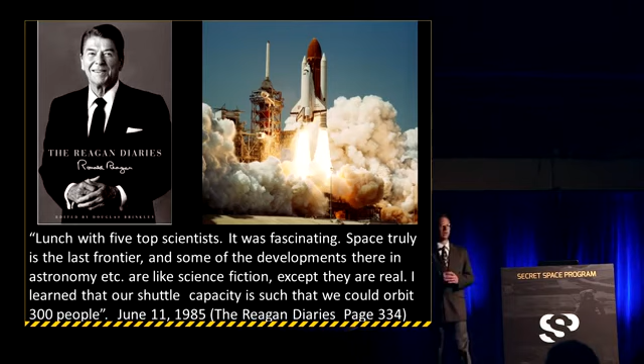So I want to ask all of you today, the shuttle only holds 8 astronauts. How does Reagan get this 300 people going into this shuttle system? How could this possibly be true?

Then we've got some interesting statements made by Neil Armstrong. It says this is July 20th, 1994 at the White House: 'There are great ideas undiscovered, breakthroughs available to those that can remove one of truth's protective layers. There are places to go beyond belief.' Neil Armstrong, 25th anniversary of the Apollo moon landing. Then we have Above Top Secret by Timothy Good. Interesting statement here, a transaction between a scientist, an MI6 individual, and Neil Armstrong. This is page 186, so I'm not just making this up.

Professor: 'What really happened there on Apollo 11?' Armstrong: 'It was incredible, of course. We'd always known there was a possibility. The fact is, we were warned off. There was never any question then of a space station or a moon city.' Professor: 'How do you mean warned off?' Armstrong: 'I can't go into details except to say that their ships were far superior to ours, both in size and technology. Boy, they were big and menacing. No, there is no question of a space station.' Again, this is page 186 of Timothy Good's Above Top Secret.

So it turns out, ladies and gentlemen, that there are, in point of fact, 2 space programs: one in the form of a public relations smokescreen organization known as NASA. The other one is called U.S. Air Force Space Command, also known as Solar Warden, and that comes from Paul LaViolette and the Huffington Post, 12/7/2012. Here's another question we need to look at too.

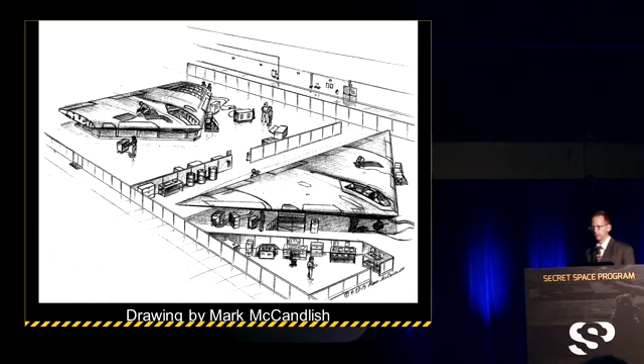And so, ladies and gentlemen, I believe that this is probably the closest we're ever going to see regarding the A-12 Avenger II program. However, there may actually be more to this story than meets the eye. There might be something secret going on with the A-12 Avenger II.

This is a letter written to a colleague of mine by the name of Lee Graham. This is from Armen Victorian, dated December 30th, 1992. I want to bring your attention to this bottom section down here. And he says, Section A, Navy's A-12 prototype was completed and flown by Lockheed. Completed and flown by Lockheed.

Two other sources have confirmed from General Dynamics that right around 1990, Lockheed basically picked up the pieces of the A-12 Avenger II program from General Dynamics. They've confirmed that there were, in point of fact, two assembly lines running at General Dynamics. One was the Navy version, which was canceled by Dick Cheney January 7th, 1991, and there was a secret Air Force version of this aircraft.

When Ben Rich, head of the Skunk Works between 1975 and 1991, had his team look at this edge, they noticed a single straight edge was very bad for radar cross-section. So Lockheed Skunk Works engineers designed a notch into the trailing edge and clipped the wingtips to reduce the radar cross-section. That's the AX-12 Air Force version of the A-12 Avenger II, which is completely black.

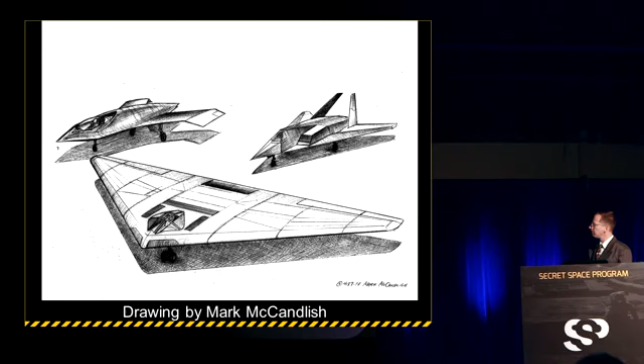Another drawing done by Mark McCandlish, talking about the Sneaky Pete, also the Have Blue prototype, and then the Boeing Phantom Works Bird of Prey. Detroit Free Press: 'Secret ledger hides military projects, Pentagon black budget has tripled under Reagan administration.' I want to quote my source: Detroit Free Press, February 8th, 1987.

They had a very interesting graphic illustration, which I've redone in AutoCAD to give you an idea. If you look at the procurement funding on these programs, in 1981 the black budget grew by just over $500 million. By 1988, that figure rose to nearly $9.122 billion. So you can see this exponential growth in the black budget.

Federal spending by category: procurement spending for agriculture was $26 billion, transportation was $28 billion, but the Pentagon's black budget for fiscal year 1988 was $35 billion. So they're spending more on black budget programs than on education. Is there mismanagement of funding here?

Do we have bridges breaking? Do we have schools falling apart? That money could be put into other programs. Total spending for procurement funding of the Air Force for '88 was 51 billion, of which 19.1 billion was in the black budget.

In this article there are two quotes I think are interesting to keep in mind. Thomas Amlie, a Pentagon missile expert with security clearances high enough to know about some black programs, said the military has three basic reasons for having them: one, you're doing something that should genuinely be secret; two, you're doing something so stupid you don't want anyone to know about it; and three, you want to rip open the money bag and get out a shovel because there's no accountability.

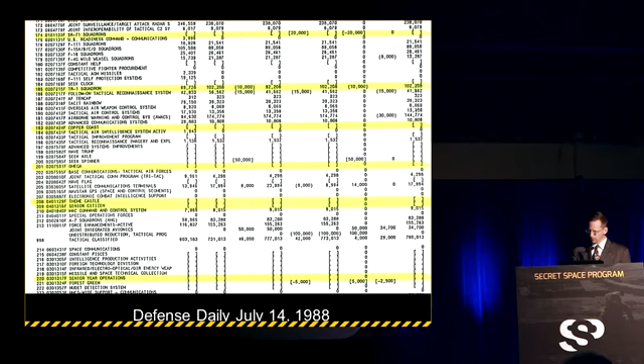This is an interesting publication, 1970, J.W. Fulbright. He really brought it home. It says the greatest threat to American national security is the American military establishment and the no-holds-barred type of logic it uses to justify its zillion-dollar existence. These programs have gone rogue, with no congressional oversight.

A couple of quick code names I want to bring to your attention. This comes from John Andrews, Senior Project Design Engineer at Testors Model Corporation in San Diego. He was tracking these black budget fundings, and he wrote this FOIA request to the DoD. A couple things to look at here: Rosetta, classified program. Housekeeping—what's housekeeping? Redbird, and then the two final ones, 4 and 5, Rainbow, and something called Snowbird, which we really want to get into. Groom for secrecy—Groom Lake toxic burning alleged.

Las Vegas Review-Journal, March 20th, 1992—they really did a good job on this article. Basically what they're saying is, during the stealth program, vintage 1981 to around 1988 according to this article, Burbank Lockheed Skunk Works Division was trying to get rid of all their toxic chemicals, solvents, and resins. They put these in 55-gallon drums, and twice a week, on Mondays and Wednesdays, an 18-wheeler tractor-trailer truck hired by a foreign company called NDB would drive all the way from Burbank Skunk Works to Area 51.

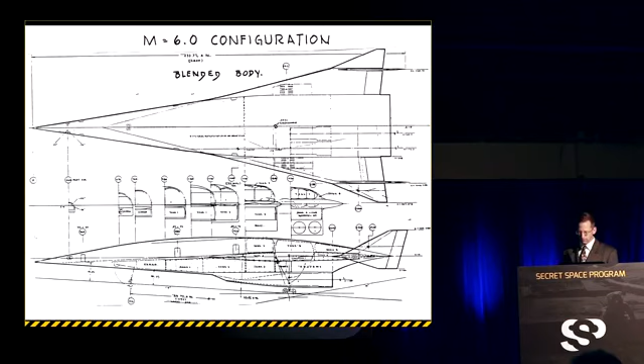So we've reversed the image to show you what this actually could have looked like. This remains today a classified program. Now, if you look in the Boeing archives, you'll see this motif, this legacy of development regarding 75-degree swept wing configurations for hypersonic aircraft. This may be a configuration that Chris Gibson actually got to see.

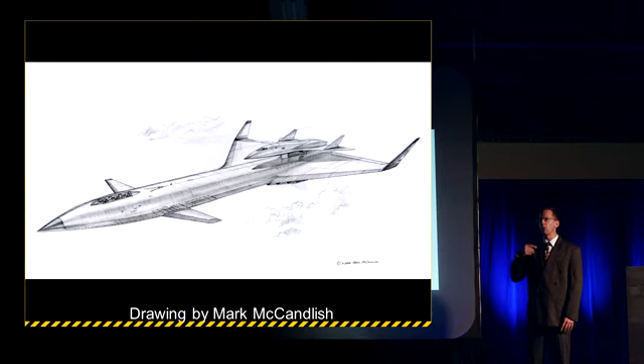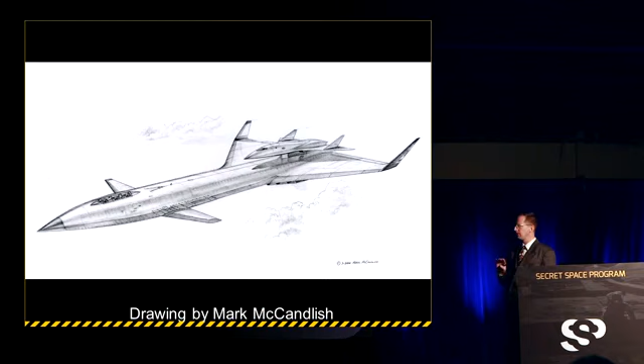Another drawing by Mark McCandlish. Interesting backstory on this aircraft. When the colonel who first laid eyes on this particular configuration saw it for the first time, he said that was an elegant lady, and so that name has stuck with this aircraft. It is a 2-stage-to-orbit space plane consisting of a mothership and a parasitic aircraft that's launched from the spine of the mothership. Each of these wingtips is estimated to be about 16 feet tall. It has a pilot, co-pilot, and something called a launch control officer, who is the liaison between the mothership and the parasitic aircraft and sits aft in the last seat. It has 2 canards that can retract for high-speed flight. It's powered by either 4 combined cycle pulse detonation wave engines, or as Mark mentioned, scramjets too.

Now, what evidence do we have for this? Aviation Week & Space Technology, August 24th, 1992, talks about eyewitnesses who saw this in the Antelope Valley, Lancaster, Palmdale area, so we've got some good sightings there. This is the model called the SR-75 Penetrator, done by John Andrews, who is the Senior Project Design Engineer at Testors Model Corporation, San Diego.

We believe that the mothership configuration here is about 85% correct. This parasitic aircraft has the correct wing sweep angle, but we don't believe the configuration of where the engines are is correct. This is a photograph of John Andrews, so if there was any question about this gentleman's integrity, it was never challenged because he was a gentleman until he passed away in 1999. His veracity was never questioned, so you can hang your hat basically on information provided by John Andrews.

A good scale model of what this looked like. Interesting thing: people who have seen this said that the configuration and color of this aircraft was kind of a light white or gray with a blacked leading edge. The air intakes on this aircraft were diagonally cut at 45 degrees, and people who saw it take off said the air intakes were so large that you could drive a Volkswagen right into them. So we're talking large air intakes.

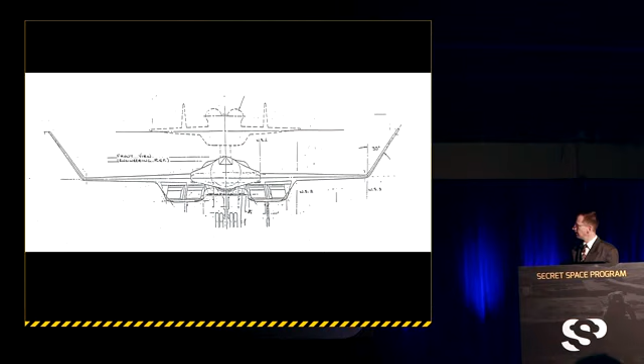John McNeil put this together, showing you the 2-stage-to-orbit spaceplane system. Again, you can see the air intakes in this location and these large winglets.

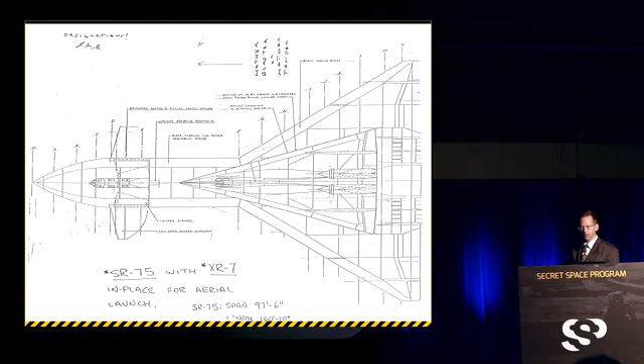This is a top view looking down, showing the scale of this aircraft. We believe this aircraft is not called Aurora, but in point of fact either Senior Year or Senior Smart. That's believed to be the code name for this particular aircraft.

One other propulsion system that may be associated with the mothership of this aircraft is something that Marc T. Constantine, who was the Aerojet Tech Systems Division Manager, discussed in a 1985 lecture. Here is one propulsion system that may be associated with that two-stage-to-orbit spaceplane system.

Here's what he said: the air turbo ramjet, or ATR, is a combined cycle air-breathing engine which we commonly refer to as cold turbine technology. By combining the rocket engine and air-breathing engine technologies, the ATR can achieve static thrust-to-weight capability in excess of that available from our most advanced turbojet and turbofan engines.

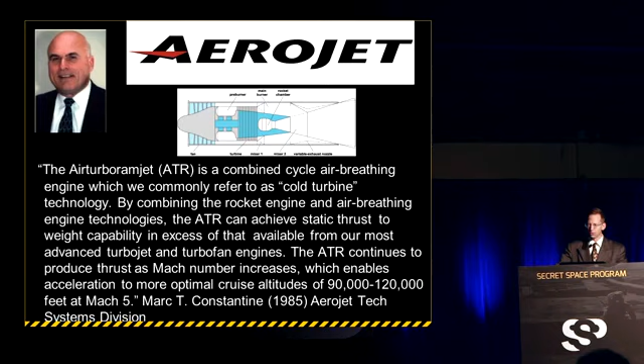The ATR continues to produce thrust as Mach number increases, which enables acceleration to more optimal cruise altitudes of 90 to 120,000 feet at Mach 5. So this is exactly the kind of speed range we're talking about here.

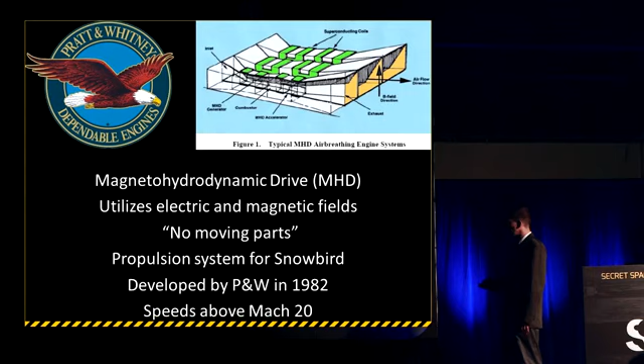It turns out in 1982, Pratt & Whitney, who has a long history with Lockheed because they developed the J-58 that powered the SR-71, developed something called a magnetohydrodynamic drive, also known as an MHD. A couple of quick points: it utilizes electric and magnetic fields. So this is not an engine, ladies and gentlemen - this is a drive system. There are no moving parts. It probably is the propulsion system for Snowbird, developed by Pratt & Whitney in 1982.

Speeds above Mach 20. So that's way out there in the speed regime.

Now, Wizard of Oz, somewhere over the rainbow. Is there more going on here? Somewhere over the rainbow - this is the song that Dorothy sang in this very popular movie. Is there something more going on here, or is this just a song?

Let me bring your attention to this letter from Robert Jameson to John Andrews, February 28th, 1994. Here's what he said - he was a military monitor. On 367.7, I overheard a conversation between a KC-135 tanker at 47,000 feet calling Rainbow 1 that they were on station. Approximately 7 minutes later, Rainbow 1 called quote-unquote 'Big Boy' for a fill-up. The tanker returned the call but said if you would turn on your lights, it would be easier to find you. Rainbow 1 told the tanker to go to Secure Channel G, end of transmission.

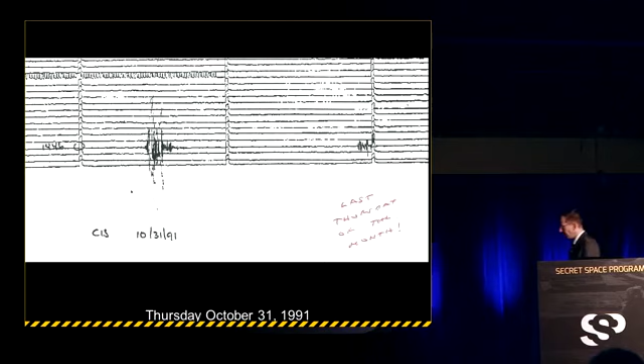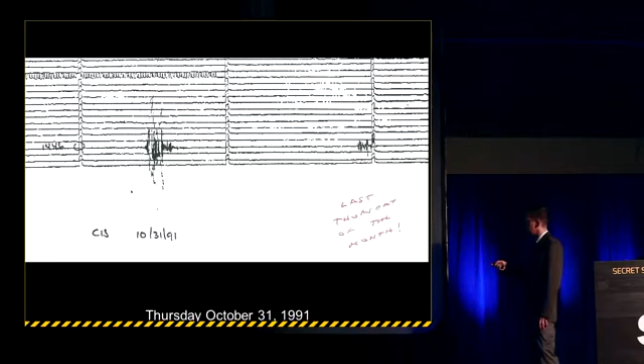So if you look at what's done here, last Thursday of the month, October 31st, 1991—remember, these tick marks are one minute apart. So, boom, right? This is your Aurora returning from an overseas mission. Now about a minute later, another boom. You might think that's the mothership returning along with it, but the mothership isn't even back yet, and it doesn't even fly the same pattern. So this might be either an F-16 or an F-15 flying as a safety chase aircraft—not the mothership flying with the parasitic aircraft.

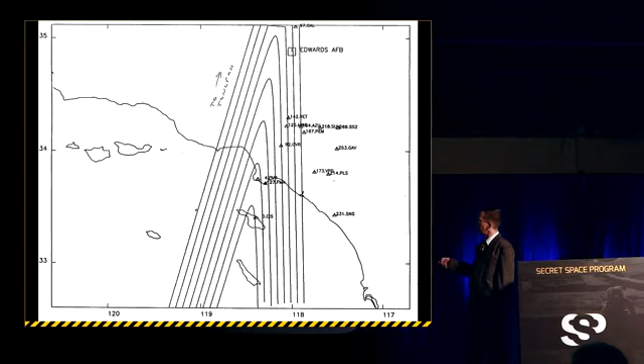Catalina Island, Thursday, January 30th, 1992, 7:17 a.m., another boom. And then about a minute and a half later, number two. So you can see you've got this parasitic aircraft flying over Catalina Island—it wakes everybody up in the morning in Los Angeles, and then a chase plane follows it. Here's the track returning to Area 51, going over Catalina Island, Los Angeles, waking everybody up, then heading north of Edwards Air Force Base, going into Tonopah Test Range, and then into Area 51.

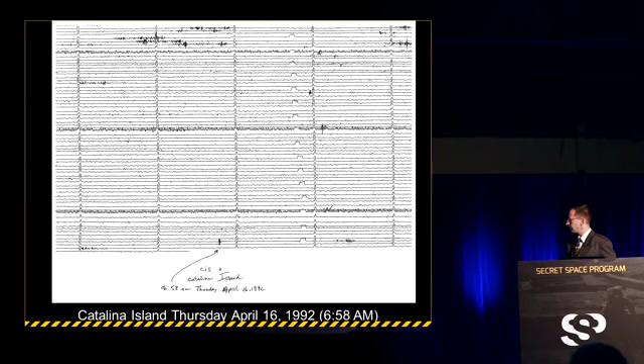So I want to give you a brief cross-section of what their flight pattern looks like. Again, Catalina Island, Thursday, April 16th, 1992, 6:58 a.m.—always on a Thursday. Mount Wilson, April 16th, 1992, Thursday, 7:02, another one. It just goes on and on. The evidence is overwhelming.

Okay, so here is a typical snowbird mission profile flight path. This came from Jim Goodall. I asked Jim what the flight path of these aircraft was, and this is his interpretation of what these aircraft may be flying. He believes this is a nuclear proliferation monitoring aircraft, because at the fall of the Soviet Union, they had to figure out a way to monitor all the fissionable material that was loose within the former Soviet Union.

So what you do is start at Area 51, take off, and take up a magnetic heading of 310 degrees. You fly over Alaska—at this point you're still with the mothership, at about 30,000 feet at Mach 1.7. It's at this point you launch from the mothership and pour the coals to it. You go over Russia, make a 90-degree left-hand turn, start heading south, and you're over Turkey, then Israel.

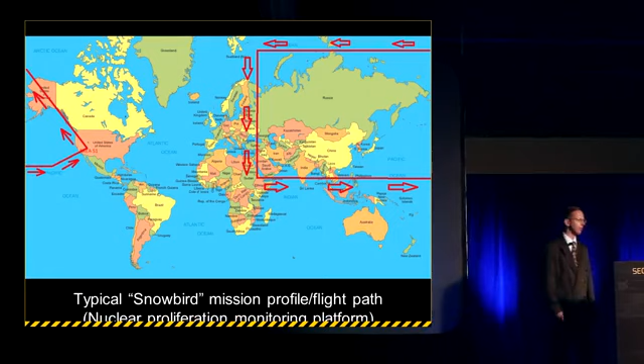Once you get down here, you make another turn and pour the coals to it again, heading back. At this point you're near Hawaii, starting to make a left-hand turn. Now we're heading into California, going over Catalina Island, where we wake everybody up at 6:58 a.m., then right back to Area 51. So that may be the mission profile these aircraft are actually following.

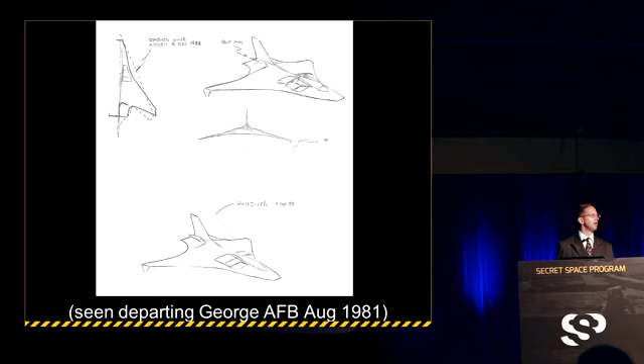This is something I got from the John Andrews collection, which I was fortunate enough to acquire. This is August 14th, 1981, a letter to Ben Rich, former head of Lockheed Skunk Works between 1975 and 1991. It says: Ben Rich, your crew responsible for two very strange birds leaving at dawn, just at first light, from George Air Force Base. One white, one gray, said to be very Lippisch-like, good acceleration, good climb, don't loiter around George, and not seen for the rest of the day. So John included a sketch of something that may have departed George Air Force Base, August 1981.

Turns out there's some very good information from Bill Scott, former Rocky Mountain editor of Aviation Week Space Technology. This is March 6, 2006, talking about a program called Black Star. It appears, ladies and gentlemen, that there are two versions of this technology. There's one built by Lockheed that's launched from the spine of a mothership, and then Boeing has one called Black Star, which is air-dropped from the belly of the craft. So that's the different kind of configurations that are used. This is a Steve Douglas illustration with an XB-70 type configuration.

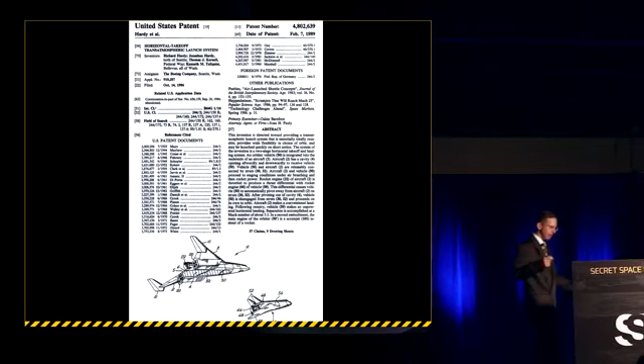Is there any proof to back this up? This is a U.S. patent, February 7th, 1989, by Boeing, and they include a parasitic aircraft that actually fits up inside an indented section under the belly of the mothership. So we've got patents to back this up, and we've got eyewitnesses reported within that article that also talk about this as well.

Then we come across this particular letter to Pete Ames from John Andrews. It says: 22nd February, 1994. The place, Kadena Air Force Base. The time, the weekend of 13th February, 1994. Emergency call from manned aircraft to expedite recovery at Kadena Air Force Base, coming from north, tracked speed at Mach 4.2. Diversions for other aircraft in area. Aircraft recovered and quickly placed in secure hangar. Red 3 lockdown declared by base. Other pilots landing kept and slept in ready quarters. One white-gray C-5 launched from Holloman Air Force Base. 3-day lockdown at base. So something made an emergency landing at Kadena Air Force Base.

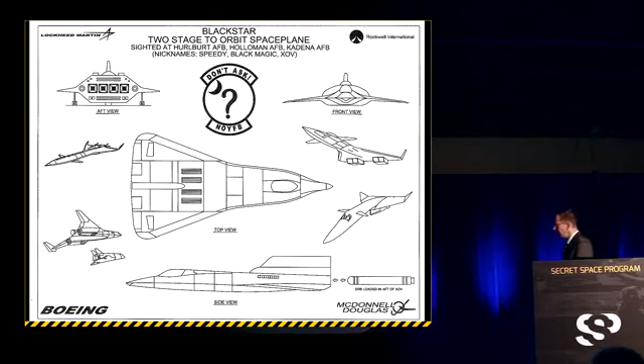And this is the configuration per the Bill Scott article. They also mention that there was a solid rocket booster that is loaded into the aft end of this vehicle. So we're definitely talking at least Mach 4.2 for this particular configuration.

The truth is out. Air Forces Monthly, March 1997, reporting on September 26, 1994, the date of an event that has never been talked about in the American press. I had to get an overseas publication for this. The details regarding this case: a top secret aircraft believed to have been a classified variant of the YF-23 by Northrop, with a crew of 2. On the application of military power, somehow the landing gear collapsed right up on the nose gear, and this thing ground to a halt. The pilots were fine. They had to tow it back to a hangar. It stayed in that hangar for 2 nights, with a tarp over the midsection. The aft section and the forward section were still exposed, so people could see what this thing actually looked like.

On the 3rd day, a C-5 Galaxy was flown into RAF Boscombe Down. This is where this took place. And as they were departing, air traffic controllers and members of the public on the ground overheard the transmission that this C-5 Galaxy was going to KPMD. Anyone who knows what KPMD is, that's Palmdale, the identifier for Palmdale. They were flying back to Palmdale.

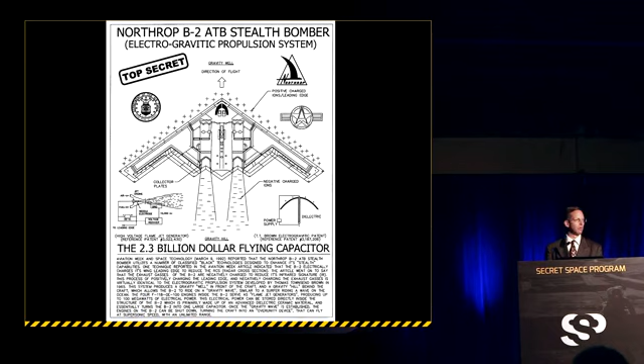And then it negatively charges the exhaust gases to reduce the infrared signature. This is the same type of electrogravitic technology that T. Townsend Brown had originally proposed in the 1930s, so this technology might date back a lot earlier than we originally thought. The proof about this comes from Electrogravitic Systems by Thomas Valone, so you can back that up.

I recently came across information from a General Dynamics engineer who had previously worked in the black world. He said, 'I'm done with the black world, I've been there, I'm through with it. I'm now a biker.' So he left the black world behind. This engineer worked on the B-2 program, and he said that for every 3 B-2s that are built, there are actually 7 anti-gravity versions of this B-2 built, according to him.

In September 1967, a naval combat veteran named Jack Pickett, who I was really good friends with and who is no longer with us, claims that he was publisher of the NCO Club newspaper. They were going down a perimeter road at MacDill Air Force Base in Tampa and got to an area called the base scrapyard. When he got there, he looked over the chain link fence and saw four of the most incredible aircraft he had ever seen in his entire life.

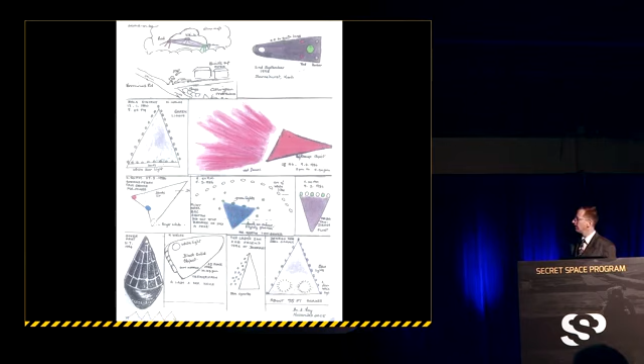We've got a case over here of a red one with this exhaust port. We've got a case in Detroit, we've got Belgium cases. So a brief cross-section of these aircraft have been seen all around the world. The primary features of these triangles: they usually have a white light on each corner of the triangle. Some of these are between 200 and 300 feet across. This midsection is generally about 20 feet across, and there's always this interesting structural work on the bottom, probably a red or amber light in the center of the bottom section of the craft.

That's kind of the overall view of what we see here. March 31st, 1999, Kirby, a very significant sighting.

If anyone in this room is a skeptic, I just invite you to look at this gentleman's testimony. Colin Saunders, you can Google him. He gave a really nice 20-minute lecture regarding this particular sighting. A very honest gentleman, I totally believe his case. He was with his family driving home at around 9:50 p.m. after dinner when they came across this particular craft.

He saw the aft end of it first. It was tilted up at about a 15-degree angle of attack on the left-hand side. Then he said the bottom of this craft tipped up, but it tipped up from the back end. He used the term that it looked like it was submerged underwater. That's how this actually moved, underwater.

Here's the view of what it looked like from the aft end. He said it was totally silent, and then he said it had these very interesting raised box sections on top of the craft. The exterior of the craft looked like a flowing liquid mercury, almost alive. He believed these extruded sections were part of a docking mechanism with a larger craft.

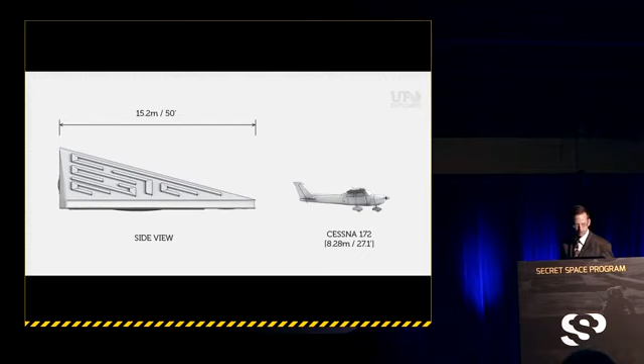This thing was approximately 50 feet across, in conjunction with a Cessna 172 that has a 27-foot wingspan. Here's Colin Sanders here, and here's his UFO model.

When I saw that UFO model, I said, wow, I want to have one of those. So I took his technical blueprint and in AutoCAD put together this schematic drawing, which is a cardboard stock model. I produced this for each and every one of you, so you can have a black and white version to build your own UFO at home, from an actual authenticated case.

This is what the model looks like right here, and this is what the bottom of it looks like. I have one for each one of you.

Now, November 22nd, 1985, 15 miles northwest of Madison, Wisconsin. Very interesting case because of this interesting tube section on the bottom of this aircraft. But we don't only have the illustration, we've got the eyewitness testimony. It says the underside of the craft resembled, quote, the back of a refrigerator, like a collection of condensation pipes that ran back and forth. So keep that in mind as we proceed here.

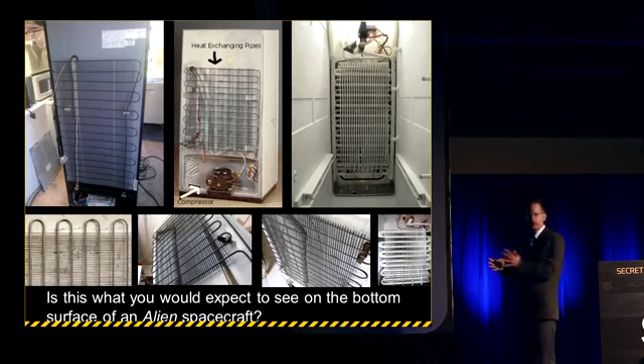I asked the question, is that what you would expect to see on the bottom of an alien spacecraft? I mean, really, I thought you aliens were 100 million light years ahead of us, and yet you're flying around in these vehicles that look like the back of a refrigerator? Someone's lying to you, folks. Someone's lying to you. I can assure you that.

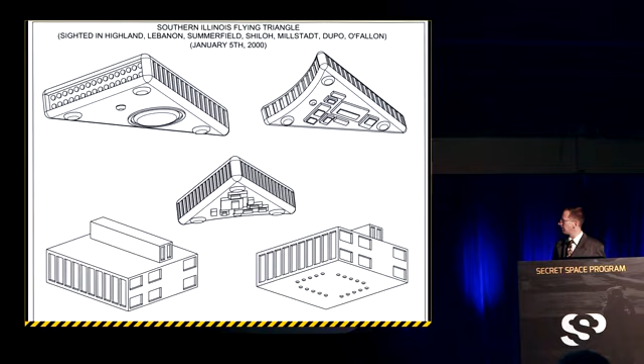January 5th, 2000, this was the first mass sighting of triangular aircraft after the year 2000, seen by at least 4 police officers, and by a miniature golf owner who said this craft looked like a 2-story ranch flying right over his golf course. A very well documented case, another case for skeptics sitting on the fence. Please examine the January 5th, 2000 overflight of southern Illinois by these triangular shaped craft.

Some of these had a red and green section in the aft portion, always these white lights at each of the corners, and then an amber or red light below the belly of the craft. A newspaper clipping service picked this up. It was seen over Dupo County and multiple counties within southern Illinois, not too far from St. Louis. May 23rd, 2001, Allen Park, Michigan - this gentleman saw this craft fly over his taxi, actually blocking out the stars as it flew over.

April 3rd through the 5th, 1975, Lumberton, North Carolina. This craft was seen by multiple police officers. It had an interesting cutout notch section in the back end of the triangle, red lights along the leading section here, and a high-intensity white light shining down a beam onto the ground, seen by multiple eyewitnesses.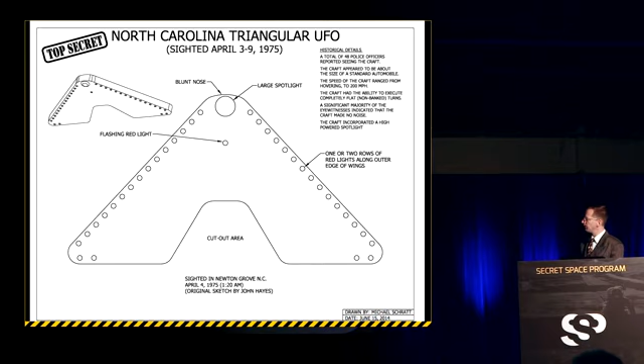This is the cutaway drawing here, showing an isometric view. This is the row of lights on the leading edge of the craft. Again, this cutout section is another motif that we see throughout these different craft.

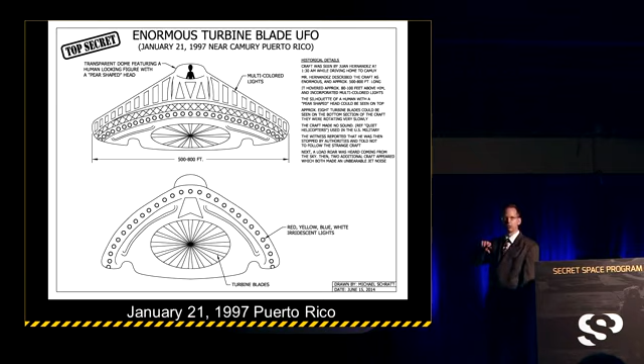No sooner did that security agent start interrogating the primary eyewitness than 2 identical craft popped out of the clouds and started following the original craft. This craft then introduced a kind of smoky blue glow around the vehicle and took off. The other ones tried to chase after it but couldn't catch it. So this is January 21st, 1997.

Another case from the David Marler files—I put together an illustration here. August 25th, 1990, Barnsley, England.

The primary eyewitness and his wife were returning from a Fleetwood Mac concert at night when, out of nowhere, a strange triangular-shaped craft he estimated at between 200 and 300 feet across emerged from a dark, misty cloud directly below the cloud bank. He said he saw it long enough, about 30 seconds, to get some really good details. It had one light on each terminating point of the triangle, and one white light on the bottom.

He said it had this recessed section on the belly of the craft, and in that recessed section he could see what looked like cross-beam and girder construction—very structural construction—on this bottom point. Then there were a series of white-lit, backlit windows with humanoid figures, and it was his impression that this was a man-made vehicle.

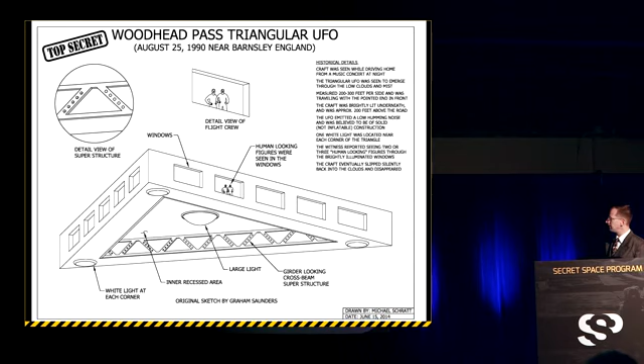That's what his impression was—that these were actually man-made vehicles. This particular individual on the right seemed to be either pointing or waving back to the primary eyewitness.

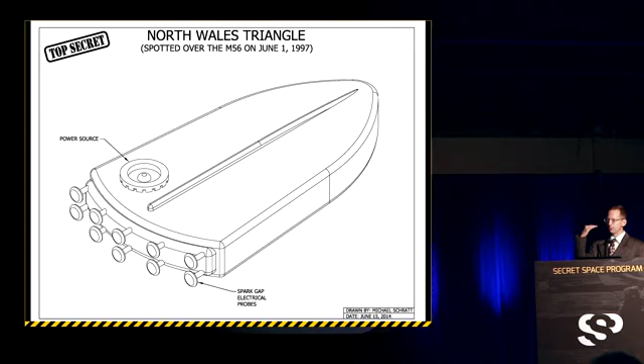Now, the North Wales Triangle, sighted over the M56 motorway on June 1st, 1997, flew across the motorway at about 100 miles an hour, startled people on the motorway, and then zipped off at a high rate of speed. That's all the details we have on that particular case.

So now we move on to the ever-present, ubiquitous, everyone's favorite triangle, the TR-3B. Anything having to do with the TR-3B has to be credited to Edgar Fouché.

I want to give credit for Edgar Fouché, and also mention that Edgar Fouché has no first-hand knowledge specifically dealing with this aircraft. He didn't work on this program, but he claims that he knew people at Area 51 who did. I want to make that perfectly clear. I don't want to divert in any way, shape, or form from his original testimony. I want to give you his straight answers to a number of questions I brought to his attention. This is his response.

Technical specifications regarding the TR-3B. According to Edgar Fouché, there are two different sizes of the TR-3B: approximately 250 feet per side for the prototype version, and 600 feet per side for the operational model. The overall mission of the TR-3B is logistics support and transportation for the Secret Space Command.

If used on a planet, moon, or large outpost, you would have a ready-made transportable space station. The TR-3B carries a crew of 4 in the prototype version. The flight control system used on the TR-3B consists of variable vectored intake and thrusters on the edges, and advanced multi-mode propulsion engines on each tip of the triangle.

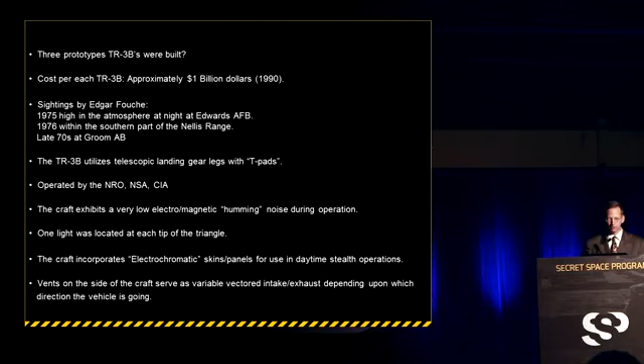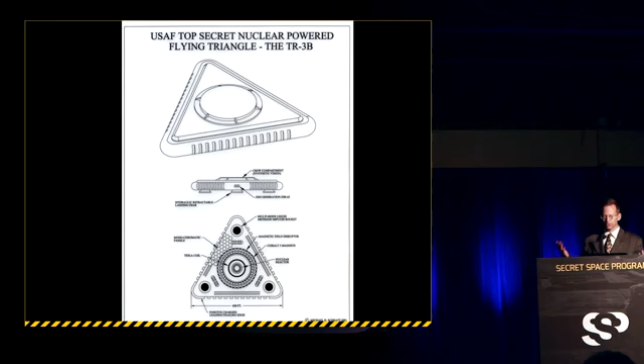So then I asked Edgar Fouché, 'Edgar, instead of you just talking about the TR-3B, can you give me an illustration of your sighting?' This is what he came up with. This is Edgar Fouché's illustration of his sighting. This would have been 1979 at Area 51.

This is Avionics Building Number 9, the Avionics Laboratory at Area 51. Again, this is the longest runway right here. And he was going from the Avionics Laboratory to a blue, blacked-out windowed bus, an Air Force bus. So it was about a 100-foot walk.

As he's walking to this bus, they had him wear these blacked-out welder's goggles so he couldn't see anything around. Edgar Fouché is a pretty big guy, so when he looked down, there was a crack between the top portion of his forehead and the top portion of these welder's goggles, and he could see a crack of light. He looked out through that light and saw the TR-3B about 500 feet away.

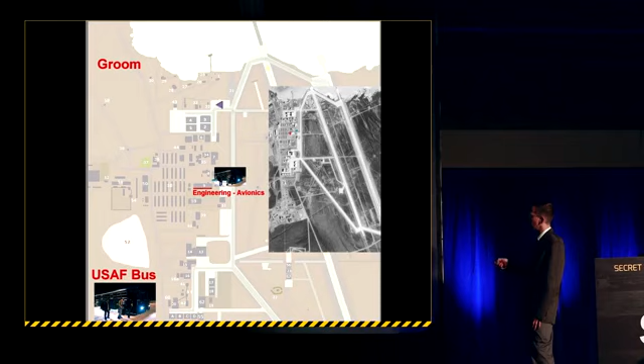This is according to Edgar Fouché. So if you look at this runway diagram, you look at the buildings—remember these are the red hat hangars right here—we're talking at least 500 feet. And so that's how close he got to perhaps one of our classified flying triangles.

Again, Triangular UFOs: An Estimate of the Situation, David Marler—this is by Richard Dolan Press, our good friend Richard Dolan. Anyone who's a skeptic regarding flying triangles, please look into this book and you'll see there's quite a good historical background. I want to make a statement here: if you thought that all triangular UFO cases were the direct result of classified military aircraft, that would be incorrect.

Now, how do we know this? Sightings of these triangular-shaped craft date back to 1890. Kelly Johnson, who formed the Skunk Works, wasn't even born yet, so it couldn't be a Lockheed bird, right? It has to be something else.

When we talk about these liquid mercury plasma engines on the magnetic field disruptor associated with the TR-3B, that's the same thing we hear about on these Vimana aircraft from 2,000 years before the time of Christ in the ancient Indian Sanskrit texts. They talk about liquid mercury plasma engines with these Vimana type crafts. So this technology might date back much earlier than we thought.

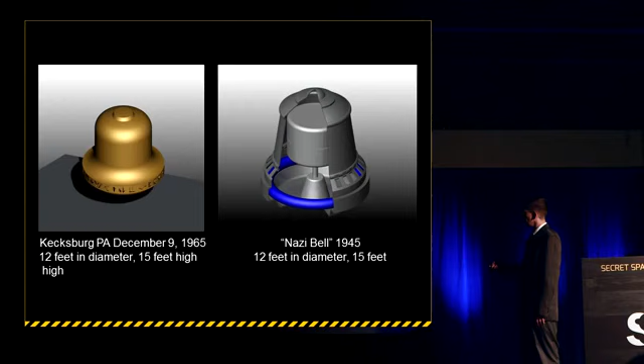Is that the same technology used in the Kecksburg Acorn recovered in Pennsylvania, December 9th, 1965? Is that the same technology used on the Nazi Bell, 1945? They had the same dimensions, the same configuration, the same bumper around the bottom circumference, the same strange hieroglyphic writing along the bottom. The Bell also had these insulating bricks associated with test flights.

Joseph P. Farrell talked about how plants within the vicinity of test flights of the Bell turned to goo within 2 hours. Scientists who were near the Bell during operation died immediately. He also talks about how there were 2 counter-rotating drums that have a radioactive isotope of mercury called Xerum 525. That may be some of the propulsion systems associated with the Bell.

By May of 1945, Adolf Hitler had 62 of the scientists associated with the Bell program murdered. This came up in the trials after Nazi war crimes were brought to public, and they talked about these 62 scientists being murdered in connection with the Bell program. My question is, did SS General Hans Kammler, who was involved in the Bell program, cut a deal with the Americans? Did he have his record expunged of any crimes in exchange for technology? That's something we definitely want to keep in mind.

Cash Landrum incident, Huffman, Texas, December 29th, 1980. By any means, skeptics cannot debunk this case. It has stood the test of time for so long, and I invite anyone questioning the validity of these cases to look at this one. You'll find that it remains rock solid.

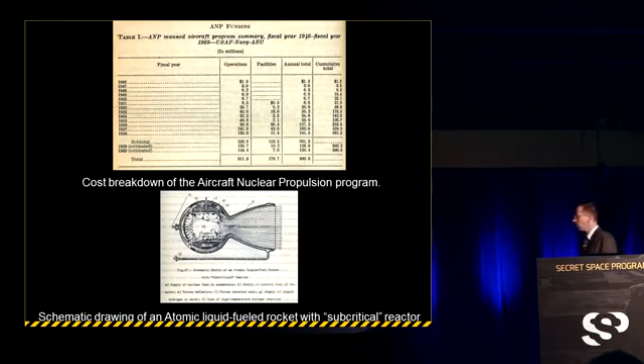It's my personal opinion that this was one of ours, ladies and gentlemen. How can I back this up? If you look at the hearing before the Subcommittee on Research and Development, Joint Committee on Atomic Energy - the Aircraft Nuclear Propulsion Program, July 23rd, 1959 - once you start looking at this document, you find out how much the United States Air Force, the U.S. Navy, and the Atomic Energy Commission spent on procurement funding for the NEPA program, the Nuclear Energy for Propulsion of Aircraft.

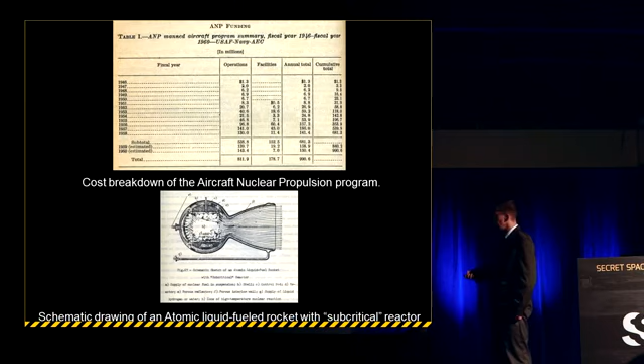Combined, they spent almost $1 billion by 1960. This is a schematic drawing of an atomic liquid-fueled rocket with a subcritical reactor. So at least by 1960, they had the procurement funding and the engineering know-how to perhaps build such a craft. Here again, an aircraft nuclear propulsion system, with different cutaways within that diagram to back this up. So again, we have a legacy of technology and paperwork to back this up.

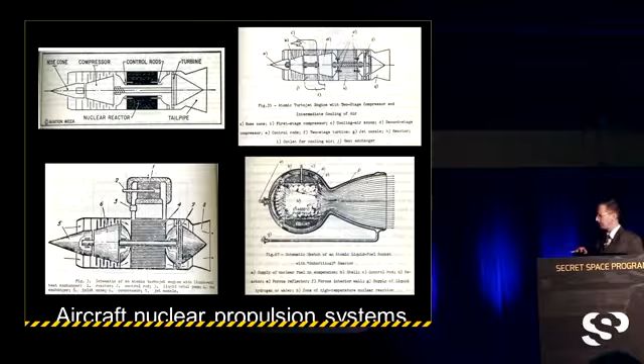I believe that this was a test flight of one of our original NEPA programs, an early NEPA program. There was a hull breach within that subcritical reactor that started spewing out fissionable material, and that's how Betty Cash and Vicki Landrum died from the effects of radiation poisoning regarding this. So it's important that we hold our government liable for essentially the murder of these two individuals.

This case was actually never heard in court. It was thrown out of court due to lack of evidence.

Now, significant statements by Ben Rich regarding advanced aerospace propulsion systems and technology. Ben Rich, very interesting gentleman. I met with his son, Michael Rich, at the RAND Corporation. He was very nice, didn't reveal any secrets, but it's important to keep in mind that Ben took over the reins of the Skunk Works from Kelly Johnson in Burbank back in 1975. He headed the Skunk Works until 1991. And I want to really bring out some points here that I think are very important regarding what Ben Rich said about the technologies that we're talking about in this conference.

Now, according to Ben Rich, and you can verify all these, they've been authenticated, I invite you to check this out yourself: 'We did the F-104, the C-130, the U-2, SR-71, F-117, and many other programs that I can't talk about. We are still working very hard. I just can't tell you what we're doing.' That's from a Wright-Patterson Air Force Base slide presentation, September 26, 1992.

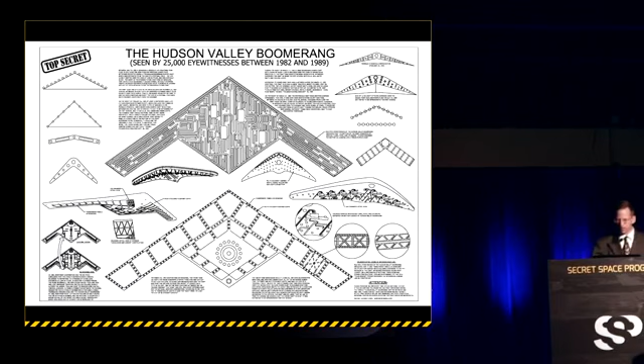So what I've tried to do here is incorporate every conceivable configuration that was seen by the eyewitnesses. Again, we've got these tubes, pipes, and cylinders that were seen on the bottom of the vehicle, a triangle trailing edge, and then here we've got this section showing you these transparent panels.

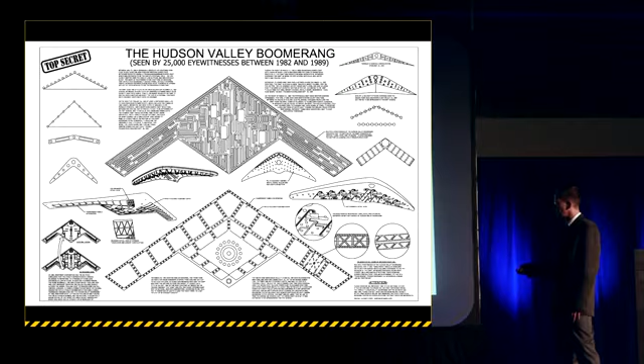Over here I've shown you the original configuration of the B-2 stealth bomber. This is vintage 1983. Northrop spent $22.3 billion of our tax dollars designing this B-2 stealth bomber, and at the end of 1983 they had absolutely nothing to show for it. The Air Force and Northrop decided they no longer wanted these high-altitude bombing platforms, and they changed the wing configuration to the double W we see today. That cost all of us $1 billion for the wing redesign.

Now, instead of me just talking about it by myself, I wasn't there. I want to give you the eyewitness testimony directly from the people who saw this craft. This is Dennis Sant, a very respectable gentleman. Here's his quote, from the Philadelphia Inquirer, September 28th, 1984. As it hovered, I could make out dark, smoky-colored metallic beams underneath, huge beams, according to Dennis Sant, regarding March 17th, a Thursday, when this actually took place.

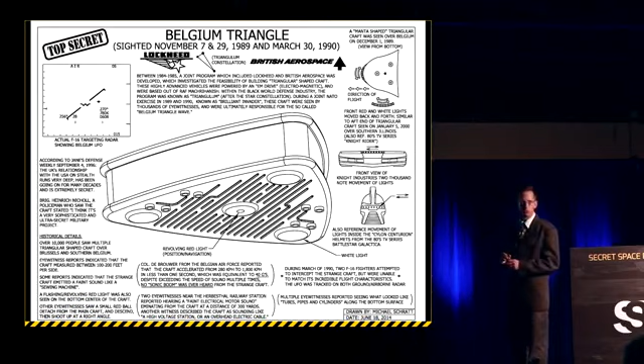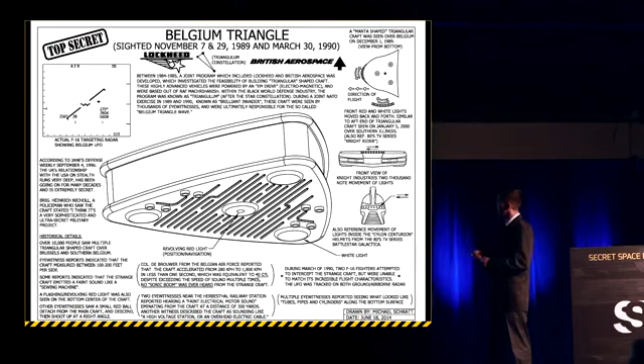But the most important point I want to bring to your attention here comes from Joseph Jones, another black aircraft researcher. He states it was a joint program between Lockheed Skunk Works and British Aerospace. This is vintage 1984, 1985. They were developing something called Triangulum. That was the code name for this aircraft. And they were working on something called an EM drive. This is part of a program called Brilliant Invader. That was the code name for this operation.

So ladies and gentlemen, I submit to you that this may be, in point of fact, the explanation for the Belgium Triangle Wave of 1989-1990, which was the Brilliant Invader joint NATO training exercise. Knight Rider shows you the configuration of the lights in this location, also the Cylon Centurion helmet here.

Now, what evidence do we have to back this up? Is it just fairy tales, or do we have something to back this up? Jane's Defense Weekly, September 4th, 1996, has a very interesting article regarding the relationship between the UK and the US regarding stealth technology. The UK's relationship with the USA on stealth runs very deep, has been going on for many decades, and is extremely secret.

Do we have anything else to back this up? It turns out that by the 1960s, they had accumulated so much information regarding what was done after World War II, when British intelligence was basically sucking up every shred of evidence recovered from the Nazis regarding radar cross-section development. That report was put in something called the Dawson Report, and then during an unknown date within the 60s, that report was brought over to Washington, D.C., and given to the defense contractors, probably Lockheed.

The other piece of evidence here is this very interesting book called I Could Tell You, But Then You Would Have to Be Destroyed by Me, by Trevor Paglen. Very interesting patch in this location right here. You'll note that the location of the beam of light is similar to the location of where the Belgium Triangle sightings actually took place.